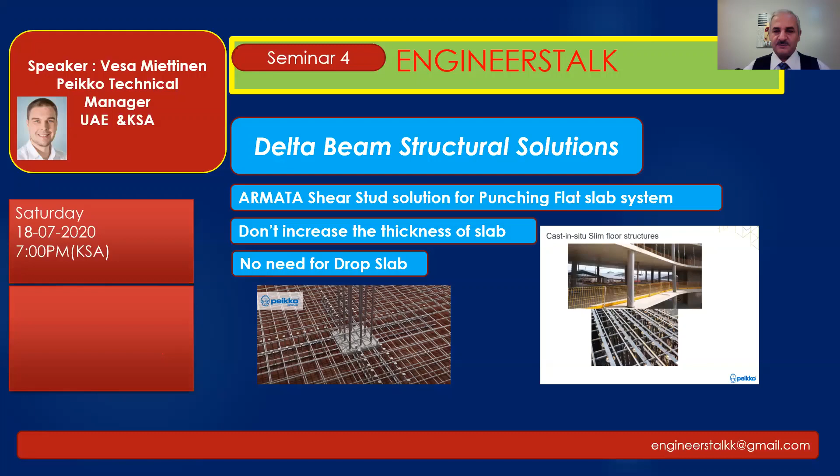So, like you said, today's agenda is Delta Beam composite beams, which we'll go through first with some basics, and then I will show you the design tools we are offering. After that we'll move on to Armata stud rails.

A couple of slides to begin about the company. It's a more than 50-year-old company, and it's a global company, started in Europe and now spread all over the world. Our closest units in the Middle East are a factory in Ras Al Khaimah, UAE, and a sales office in Dammam, Saudi Arabia.

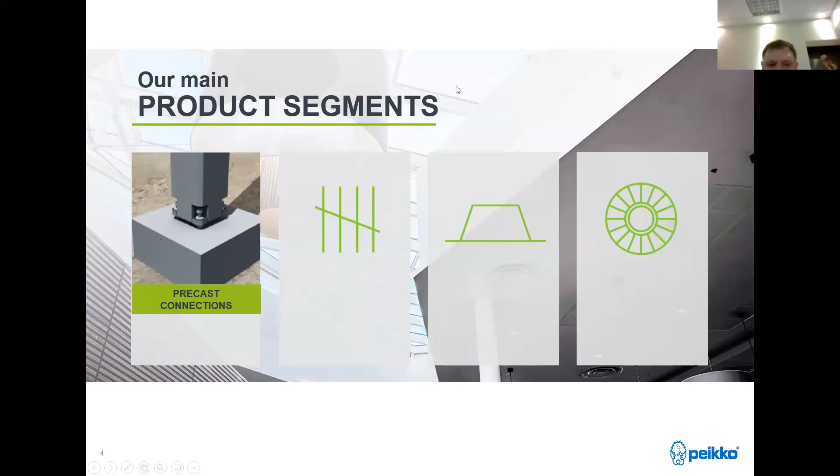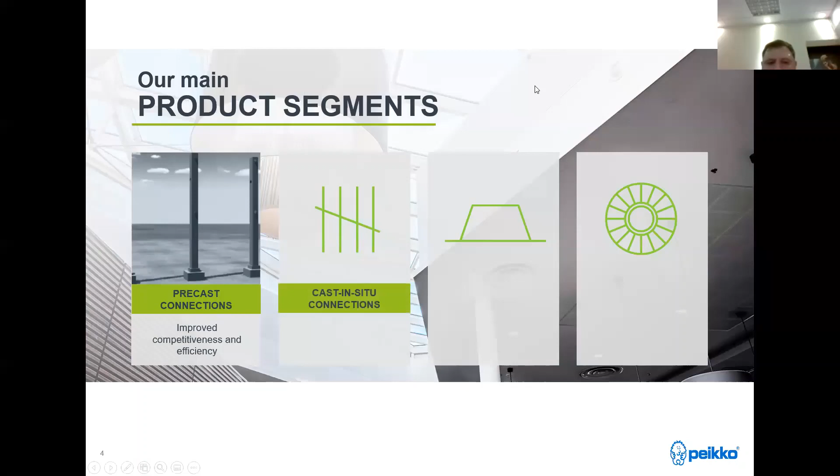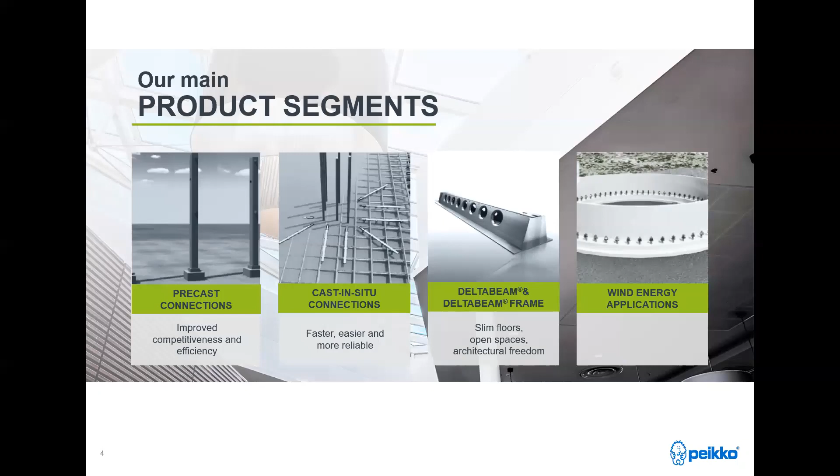We have four different product segments. First is precast connections, which we won't go through today, but if you're interested you can contact us about that. Then we have cast-in-situ connections, of which stud rails are a part. Then we have Delta Beam and Delta Beam Frame, which are the composite structures and composite frames, and wind energy applications, which we also won't touch on today. But as with precast, if you need more information you can always contact us.

So let's start with the Delta Beam composite beam. I will show you a video first. I hope you can hear the sound, let me know if it's not clear, but let's try.

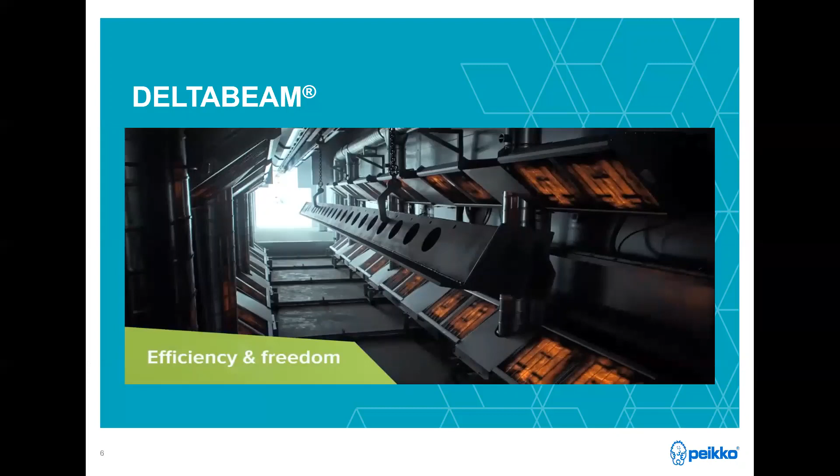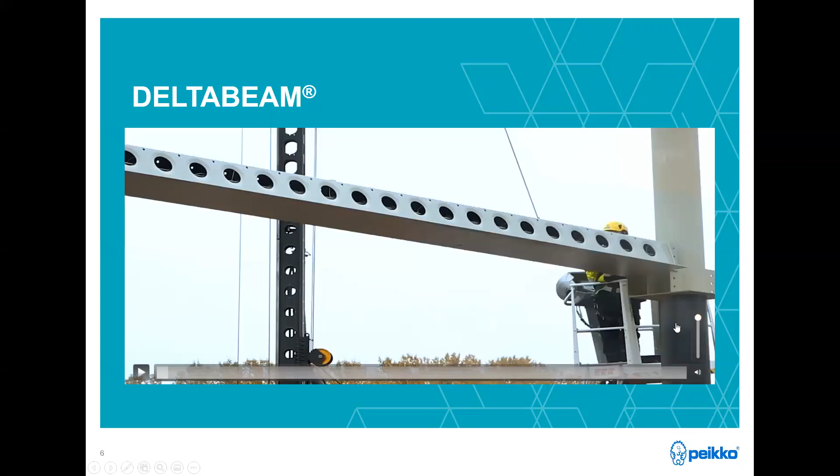Mr. Fiza, can you check the sound? There is no sound, no voice. Yeah, that's what I was afraid of. Sometimes the sound in the video doesn't come through. I don't know what the reason is.

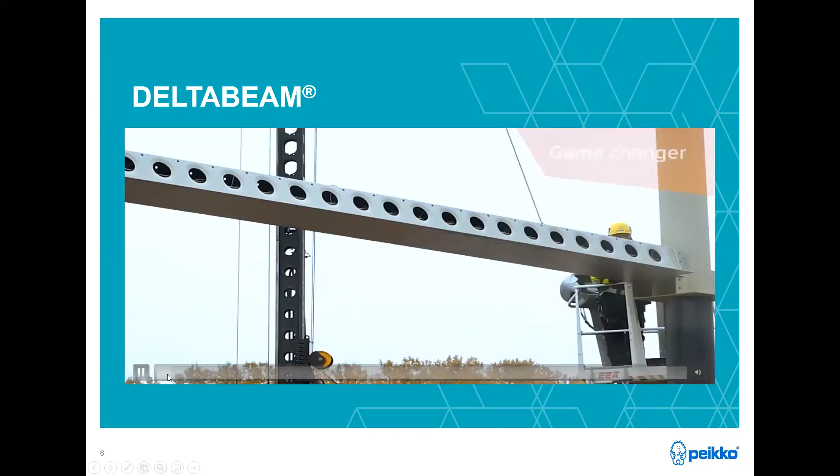Let's run it through without sound, I will explain meanwhile, no problem. So, as you can see here, it's a slim floor beam, which I will explain in more detail after the video.

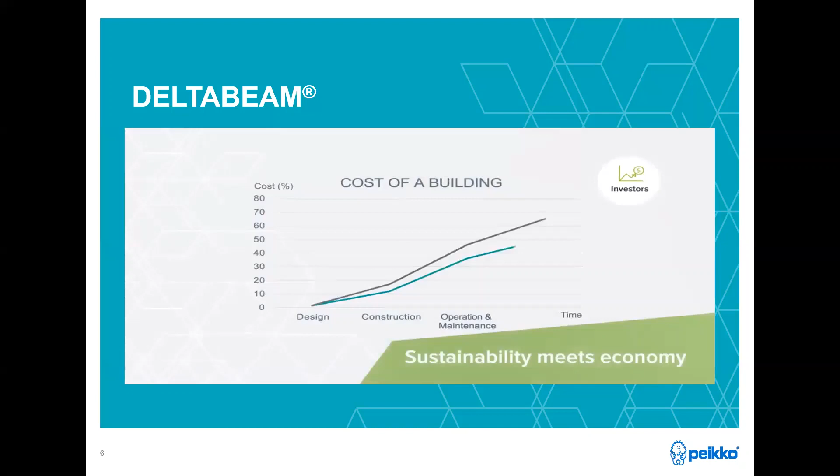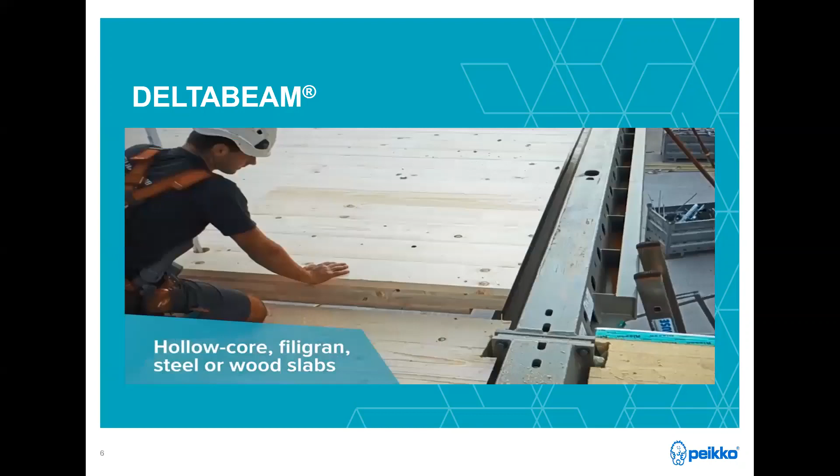So it gives you the option to lower your building height or lower the total volume of the building with the slim floor option, which is cost effective. And as it's a steel beam, the connections are very flexible to all kinds of columns. All types of architecturally demanding shapes are easy to do, and MEP installation is simpler because there's no drop.

We will go through this DELTABEAM Select tool, which you're seeing now on the screen, after the slides. I will show you what we are offering for designers, and I will briefly cover the in-house design work we do.

So far we have completed more than 15,000 projects already.

Sorry for the missing sound, but let's continue. This is the basic section you can see here. It's a steel section which is always designed project by project, and all these plates are designed specifically for the specific beams, and also the rebars inside the beams.

There is one feature, these web holes which you can see on the side, and this has an important role in connecting the beam to the slabs, creating shear connection between the beam and slabs.

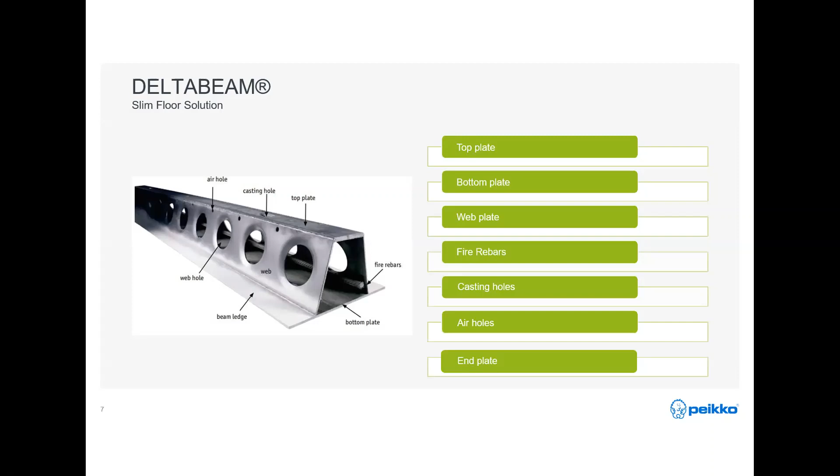As was mentioned and shown in the video, it allows you to have a low floor height. Optimizing your floor height means you can also optimize the volume of the building, perhaps even build another floor on top of a high-rise building or multiple stories. You can maybe achieve the same building height with more floors.

And of course, it's sustainable because you can reduce your cooling costs in this area. There is no heating here, but cooling. And of course it also reduces your maintenance cost when your building volume is smaller.

Mr. Fiza, sorry to interrupt, but there is some comment from our friends. The voice is not clear, if you can raise your voice or use a mic or headphone it will be better. I will try to speak a bit louder. Can you hear me now, better? Okay.

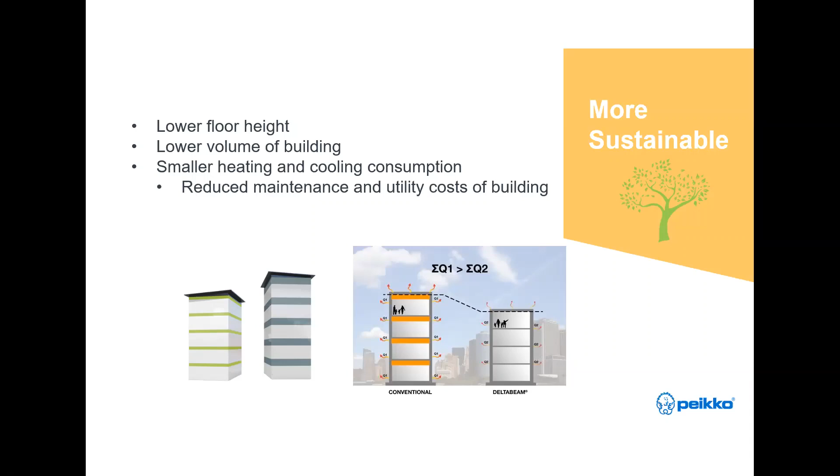And like I mentioned, we are manufacturing this in Ras Al Khaimah for the Middle East market. So it's local manufacturing with very affordable prices and fast delivery times. We don't need to import it from Europe or elsewhere.

You saw in the video this MEP. Because it's a flat slab system, there is no drop. In most cases, we will design it without a drop, unless there are very long spans that require a drop, then the flat floor option is not possible.

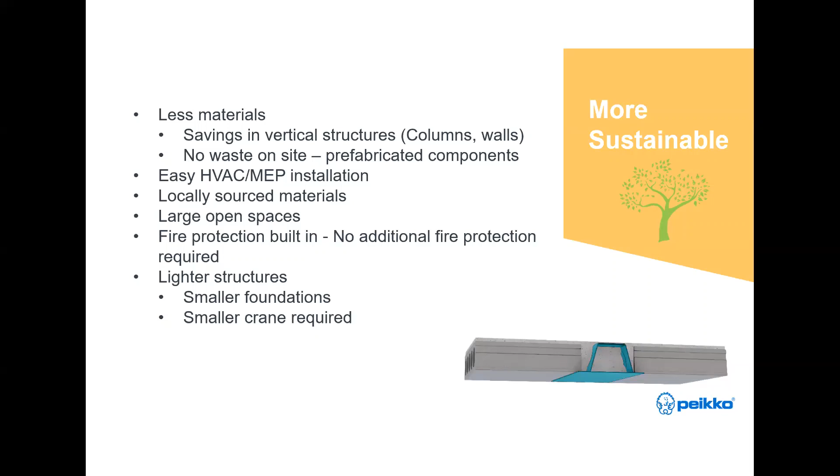Fire protection in the beam is built in, so basically even the bottom plate is exposed. You don't need any fireproofing under the beam, in the bottom flange. And it's a light structure as well. Compared to the equivalent stiffness of a concrete beam, it's much lighter, so it can allow you to optimize the foundations as well as the cranes on the site.

Here you can see as a comparison those typical steel and concrete beams, which normally have a drop, and thus some of these benefits cannot be achieved with those systems.

It's a steel beam - we manufacture the steel part at our factory, then bring it to the site, and it will be filled with concrete, so it becomes a composite section in the end. It's a very flexible beam in terms of connections, so we can create many different types of connections based on project requirements - can be pin connections, can be fixed connections.

Slab types can vary from hollow core slabs, which is the most commonly used slab type with this beam, to this kind of filigran type slab, half-cast slab, or steel decking as well. All kinds of slab types are possible.

In the bottom section, you can see also beam connections - primary and secondary beam connections are possible, as well as cantilevers in the beam.

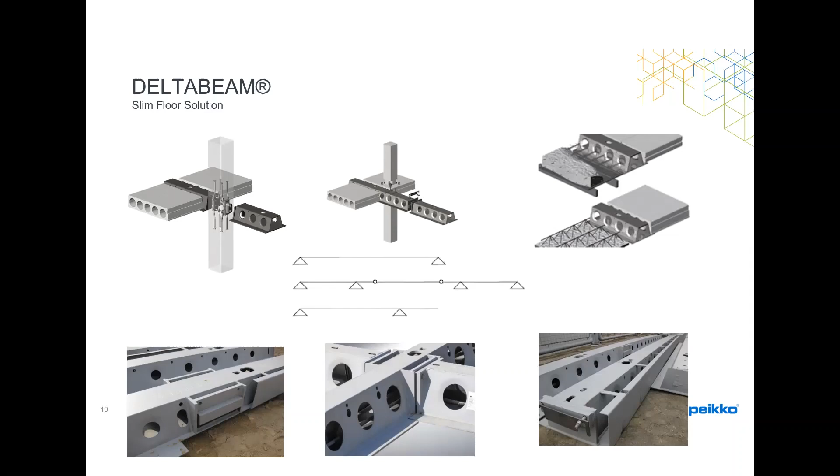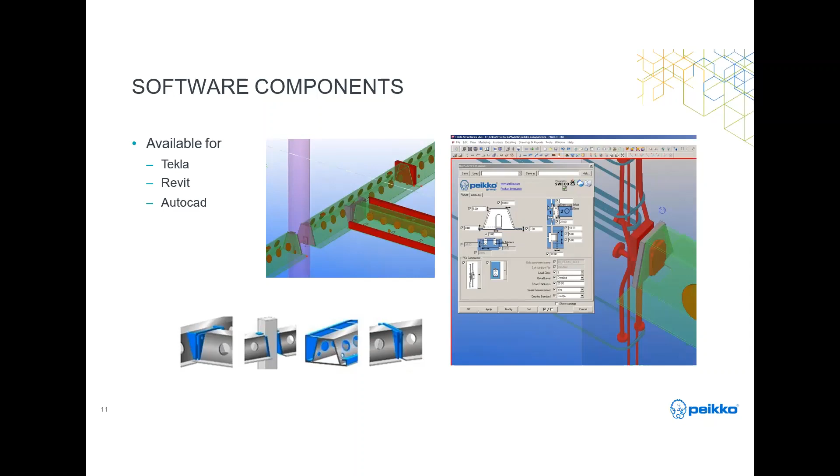Then a few words about the design. As we are mostly engineers here, I will go briefly through the design principles we follow with this beam. We need a three-stage design because there are 3 stages for the beam. First, the erection stage, which is only a steel member because there is no concrete filling inside the beam yet, so we can only utilize the steel section. This is during the erection of the slabs, when you erect the slabs on top of the beam.

Next phase, once you have erected the slabs, you will fill the beam and fill out the joints of the slabs if it's a hollow core slab, and then it becomes a composite beam. We can utilize the composite section, including the concrete, and also utilize the top concrete structural topping. In this area we always have structural topping for the diaphragm for seismic reasons, but in Europe there are cases where you don't have structural topping, just a leveling screed.

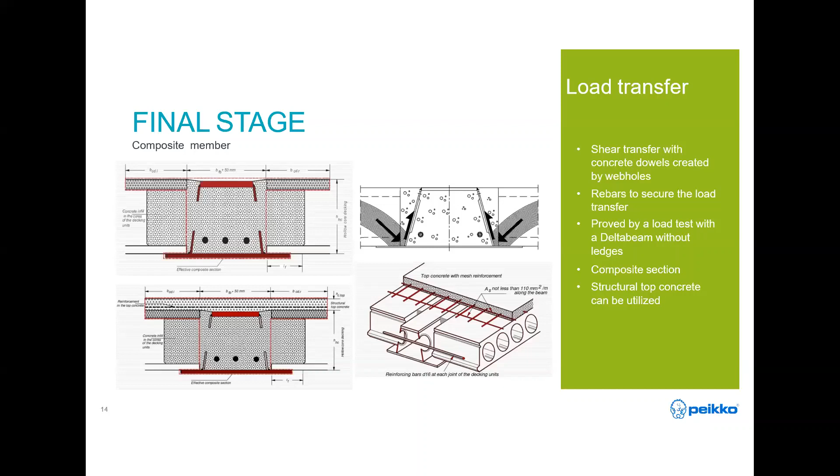Then the fire stage - like I mentioned, there is no need for any fireproofing on the bottom flange. But we place rebars inside the beam to handle the fire situation and the bending during fire, because you lose the strength of the bottom plate during fire. That's why we have these rebars inside the beam, inside the concrete, which stays cooler.

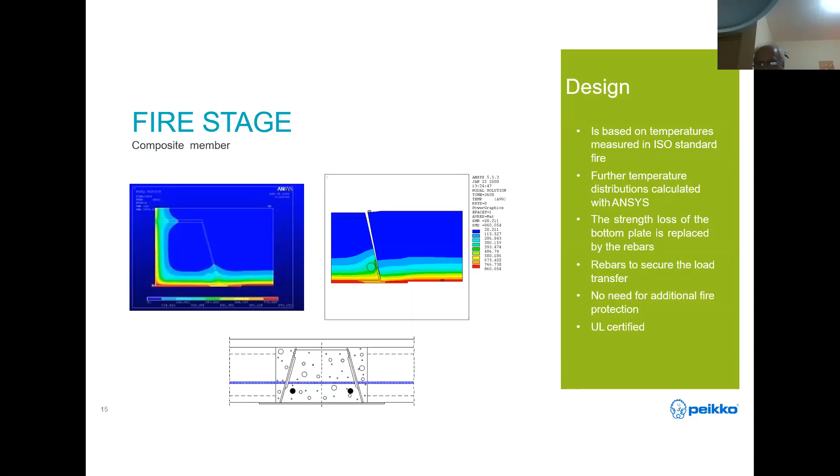For calculations, I will show you next what kind of DELTABEAM Select tool we are offering for customers, but the final design we always do in-house at Peikko. After the DELTABEAM Select tool, I will briefly show you our internal software which we use for design - just for the same beam, to compare what we calculate with this tool versus Deltabeam Select, going through the same beam design in our software.

You can find this software on our web page. It doesn't require any installation - it's a web-based tool. No need to even register if you don't want to print out reports, if you just want to see the section sizes.

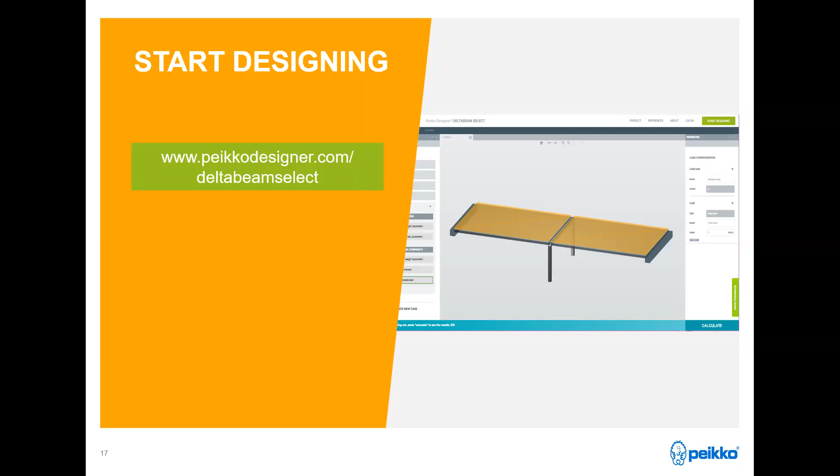So I will go through this on our web page. This is the front page, what you will see when you enter our website peikko.ae. Here you click for designers, and here you can find Deltabeam Select. When you click it, it opens here, and you can click start using.

And then it brings you to this website, so you can immediately start using the beam design here by clicking start design.

Choose your location, whether you are in UAE or Saudi Arabia, you can choose it freely from here. Then what type of the building it is - I will choose now domestic residential building. And then it will bring you to this model here.

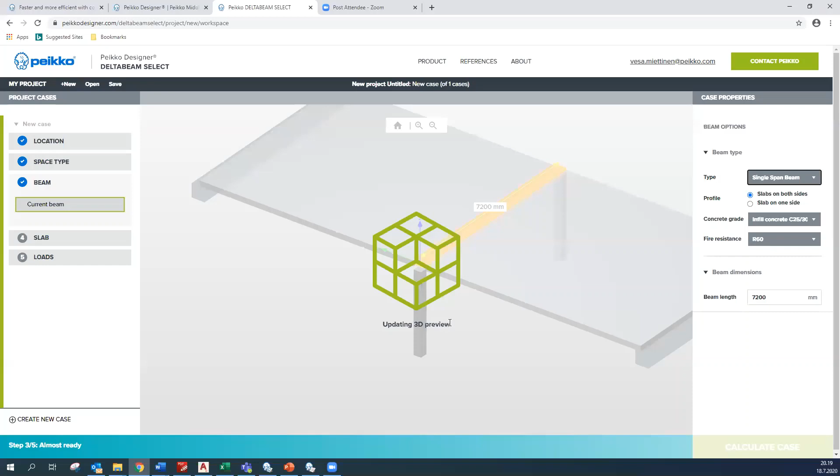So first of all, we need to put our beam here. So we can put, let's say, 7.2 meter long beam. Infill concrete, fire resistances are here. Slabs on both sides or one-sided, you can choose this as you wish.

Then next one from the left side, you choose the slabs. What is it, hollow core slab? 270 here. Top concrete, let's put 60 milli top concrete here. Maybe 8 meter long.

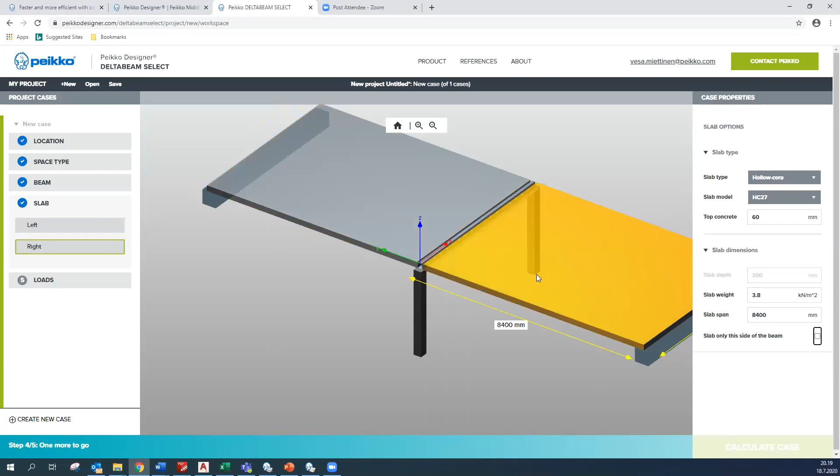And this tool is limiting the beam length to 12 meters because this is typically the limitation for the transportation. So if you have longer than 12 meter beams, then contact us and we will guide you on the special cases, because we can do more than 12 meters, but this is only the limitation on the software here.

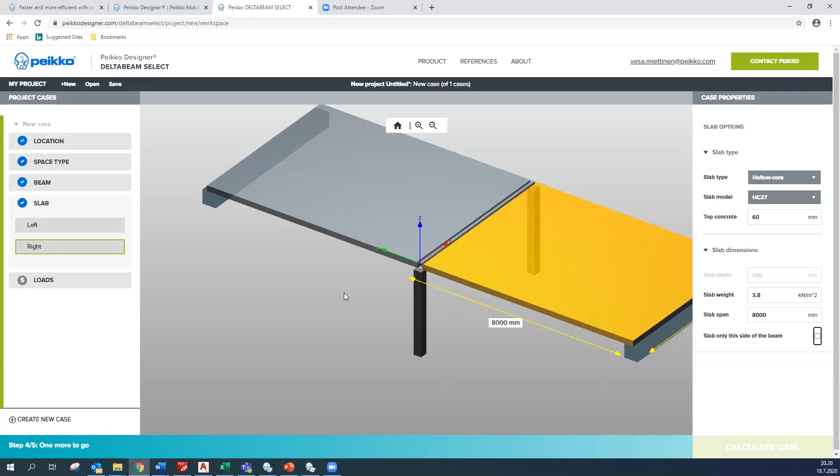Then you have specified the slabs. Last thing to do is the loads. So you can see here self-weight is automatically taken care of. Temporary loading during the installation, all the people who are erecting, for example, on top of the slabs, it's taken care automatically, as well as the self-weight of the beam. What you need to do is put permanent loads, SDL here, let's say 3 kilonewtons per square meter, and variable load, let's put 3 as well.

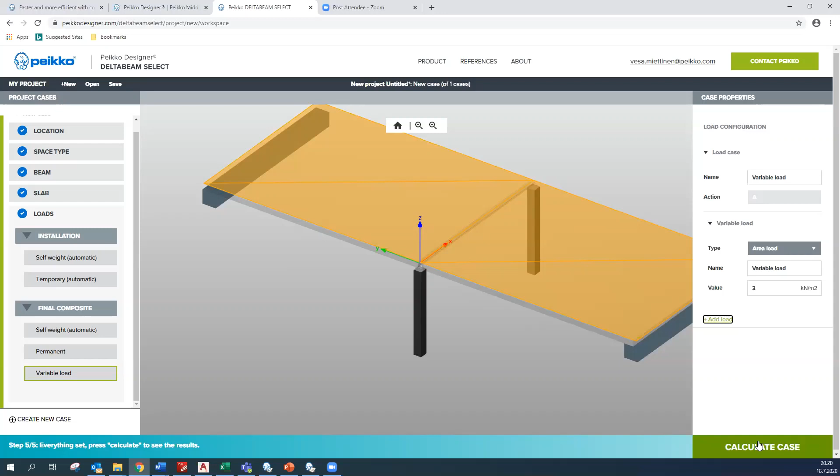Now, if everything is set, you can then click calculate the case here on the bottom right. Then it will analyze the beam, what types of - it will give you 3 different options if it's possible to use three different types, and we will see then what kind of options we have for the beam design.

Let's see when the results will be available. It takes, depending on your network connection, it takes a little while. Looks like now it takes longer than normal.

Okay, now we have got the results. So here, clicking go to results, it will show you these 3 options. So first option is slim floor option, which D26 means the beam height above the bottom flange. So it's the same height as the hollow core, 260. And 400 means the width of the web plates in the bottom of the section.

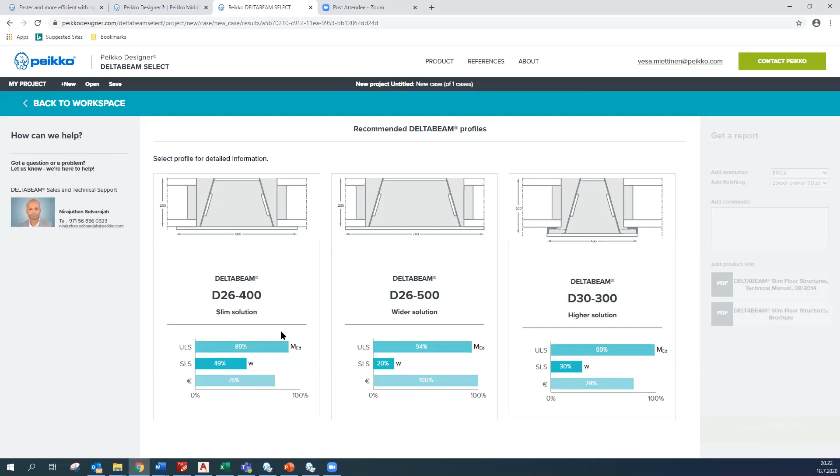Then we have another option with wider beam, D26-500, and then we have a small drop here, which is D30-300. So these are the options, and here you can see the approximate utilization for the section in ultimate limit states and service limit states. And this euro here marks just the ratio in their prices. So this wider beam is the most expensive, and related to that, these other beams are approximately 75 to 80% out of that price. So let's take this slim option, the narrower slim option.

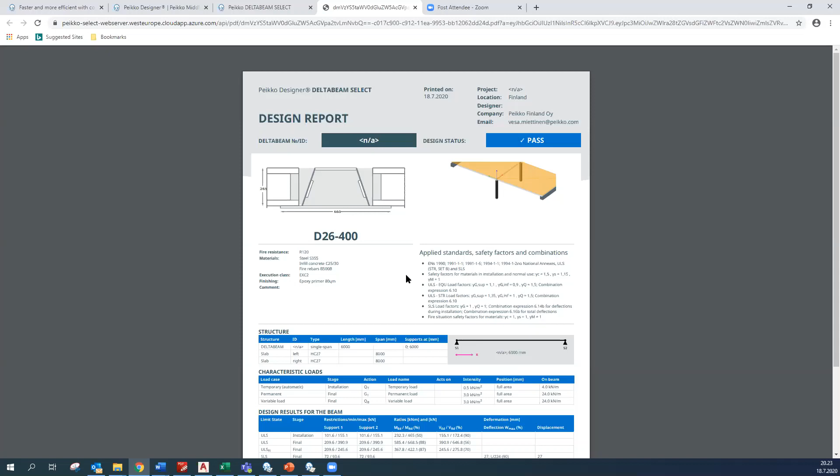And if you have signed in yourself, you can create a report. So basically, this tool doesn't allow you to design those plate thicknesses. This is the detailed design which we are doing always in house in Peikko. So you will see the section width and section height, what is possible for your case. And then if you print this design report, you will see the moments, what are the moments according to the loads and spans what you have implemented there. So this kind of report will come available from the software.

Then I will show you briefly our in-house tool. It looks like this. I made the same setup here. So our beam length is 6 meters, and from the middle of the beam to the end of the slab is 8 meters on both sides.

And when we calculate the beam here, we can see the same what I mentioned on the slides. We have stage 1, then we have the composite states, and then we have fire states, and of course we have also the deflection service limit state here as well.

So here we have the same section, D26-400, and I have used 20 milli plates and web plate 6 milli, and five rebars.

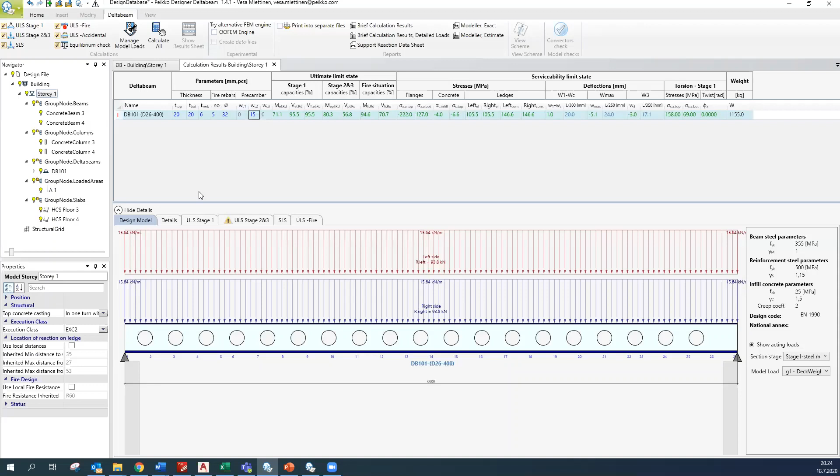5D32 inside the beam. This value here is a pre-camber value, so we are doing pre-cambering for the beam for the erection state. So when you go to SLS, after you load this beam member with those hollow core slabs and at the topping, then we are designing this pre-camber so that the beam should be flat after this, and the final deflection comes to the composite member.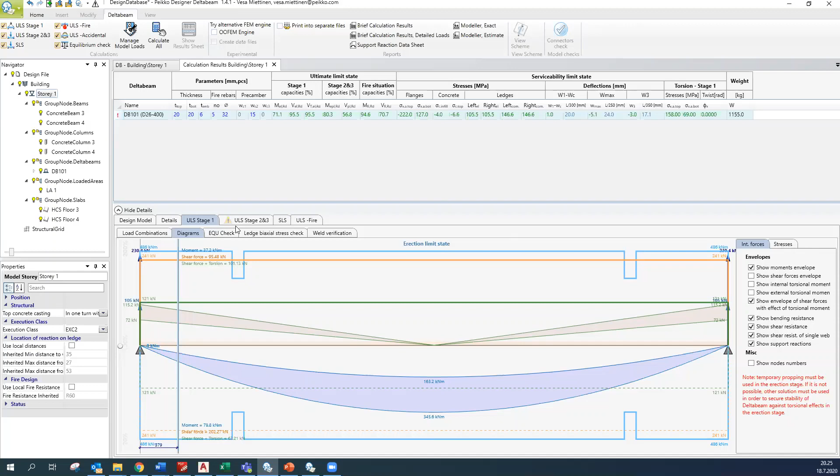So here we can see this. I will not go so much into the details, but moment for the erection states and moment capacity is here for different. If you want to see the values somewhere in the mid span, you can always track it around here. Same for the composite member. So here we have moment 551 approximately, and then capacity is 686.

When you are building, if you want to do a project with Delta beams, we of course give you the details of the section stiffnesses, if you want to input it in your ETABS model. Here you can see the steel section stiffness and then the composite section stiffnesses for sagging and hogging, depending on if you have simply supported beams or continuous beams.

This is the deflection after pre-camber when you have erected the slabs on top of the beam and cast it. And this is the final deflection in the beam, the long-term final deflection, 5.1 millimeters.

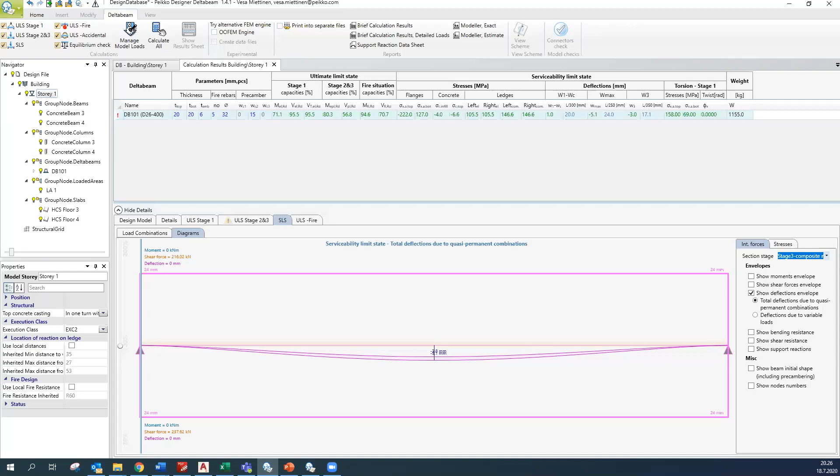Okay, let's continue. This was briefly about the softwares. Let's continue for this, Armata stud rails. Let's go through a few references for the Delta beams.

This was a hospital project in Riyadh. You can see here we created continuous beam lines, so it goes continuously over the column, and we can add holes in our beams, which allows the starter bars from the column below to go through the beam to the next column.

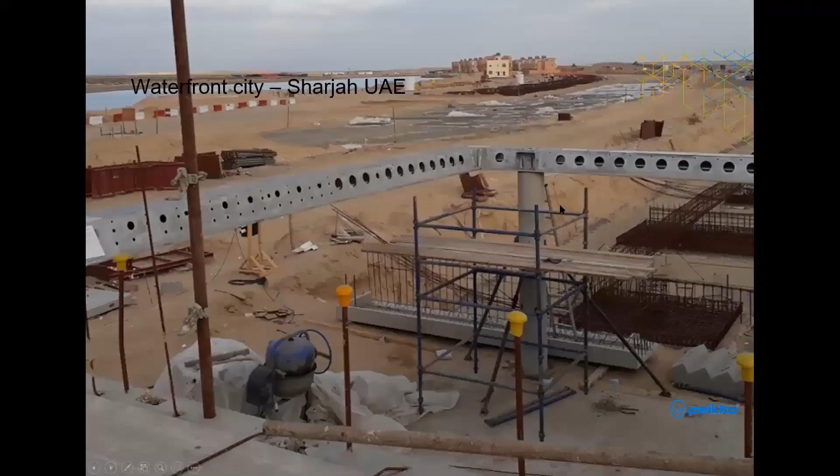And we have Sharjah Waterfront City, where you can see also this secondary and primary beam connection here. At the end of the cantilever, we connected the secondary beams to the primary beams.

When it comes to long spans, we have one project in Ras Al Khaimah where we had an 18.5 meter span in the mosque project. Here in this part, you will have this dome of the mosque in the middle.

Architectural expression - here you can see these curved sections created with Delta beams. So actually the beam section is straight, but we can do the formwork so that the facade surface will come curved already in the factory.

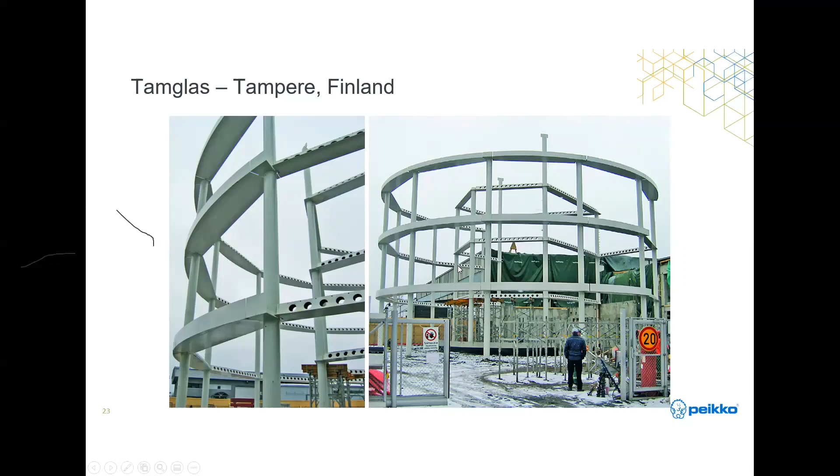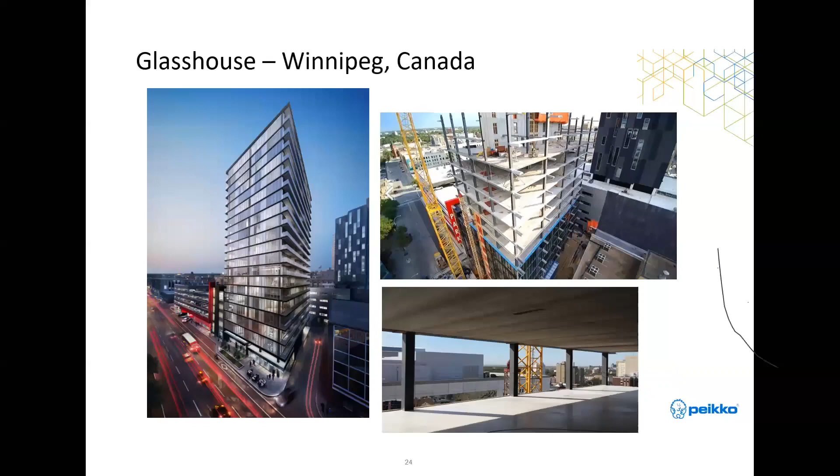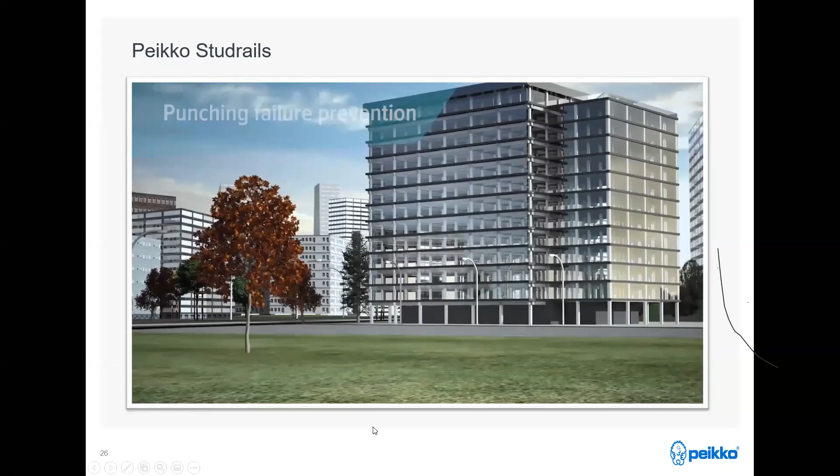All right, next topic was the Armata stud rails. Again, I have a video - I'm afraid the sound will not come, but let me try to explain. So this is also a slim floor system, but for cast-in-situ structures.

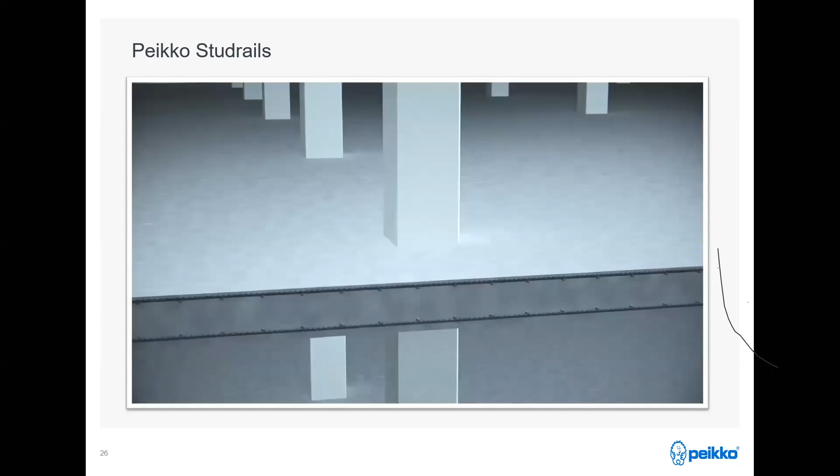Of course, there are multiple options for how to deal with the punching shear failure. It can be column capitals, drop panels, or a thicker slab. The stud rails are the best option. And it's not only for the floor slabs, you can use it as well in the foundations.

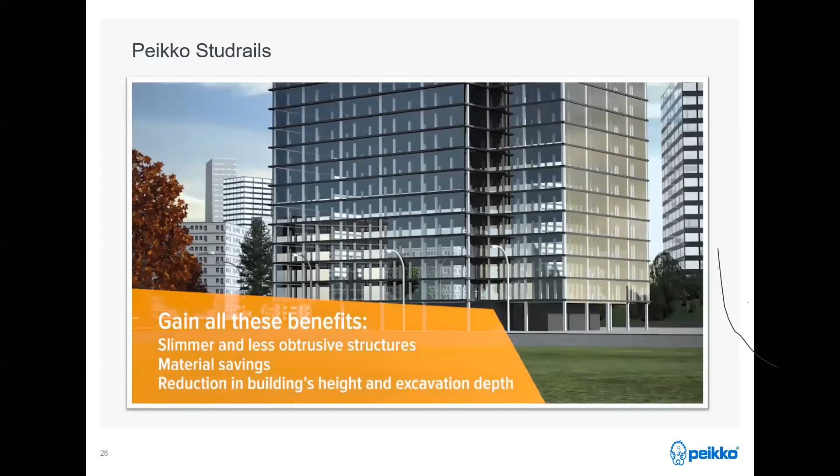Similar benefits like with Delta beam - of course you can reduce the building volume, or you can reduce the floor-to-floor height and build another floor.

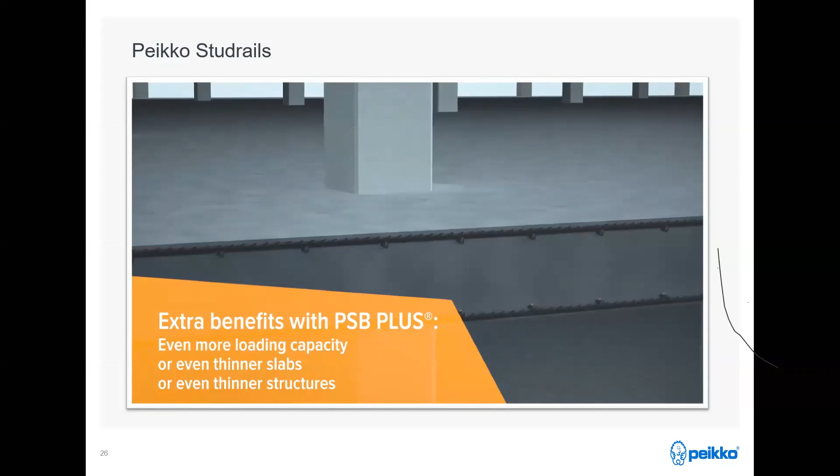There can be installations on both - creating these stud rails from the bottom first and building around it, or you can drop it from the top after you have done the reinforcing of the structure.

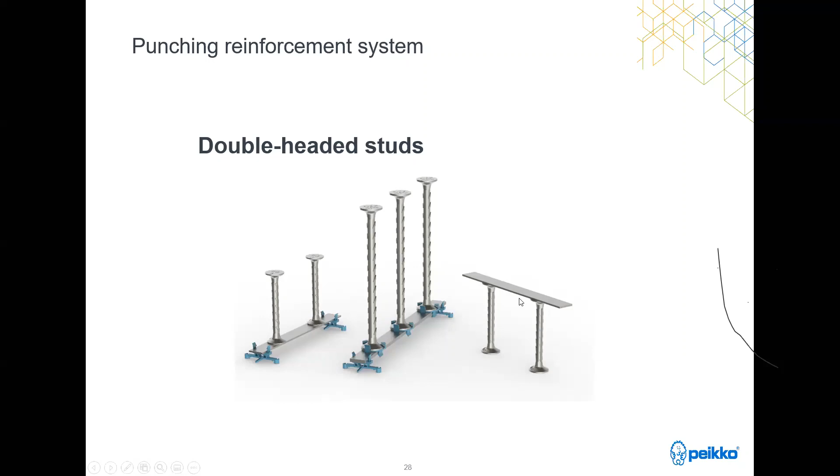Here you can see the different options for where you can use the shear studs. This is our shear stud type - we have double-headed studs, only tack welded to the rails to keep the spacing and to provide the full rails already to the site. So we are not full welding - there is no structural welding between the flat bar and the headed studs, because the anchoring will happen in the heads.

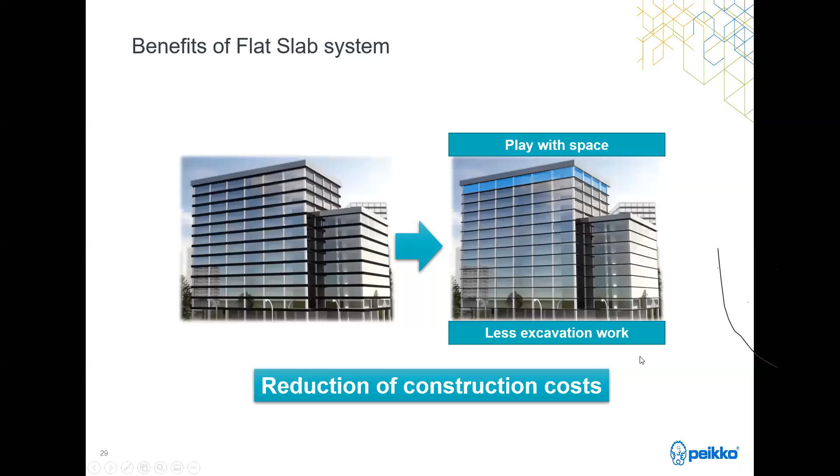This was already explained in the video, similar benefit like with Delta beam. We can reduce the floor height, avoid these drop panels, and don't complicate any of the installations. Just to have a ceiling floor that's easy also for the partition layout - you can modify it later on if required.

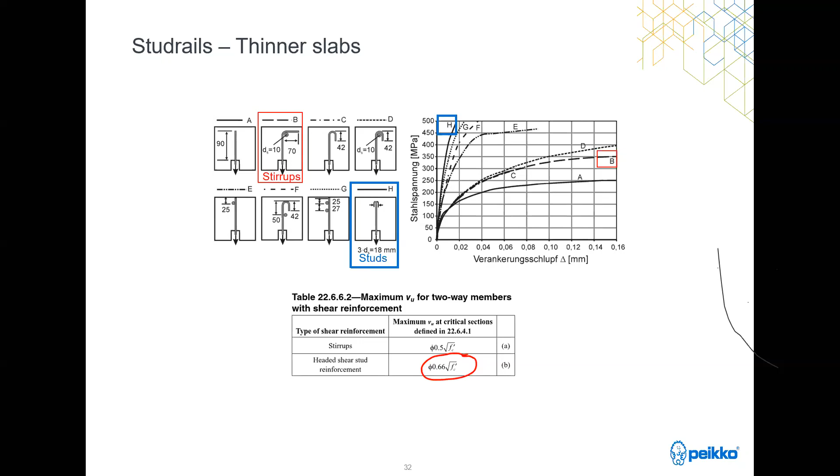These are the failure modes. I won't go through all of them, but I'm sure most of you are aware of the failure modes that can happen with punching in slabs. Of course, failure mode A you need to take into account. We cannot influence this with studs or any shear reinforcement, but you need to account for it in the slab bending design, with enough negative moment reinforcement.

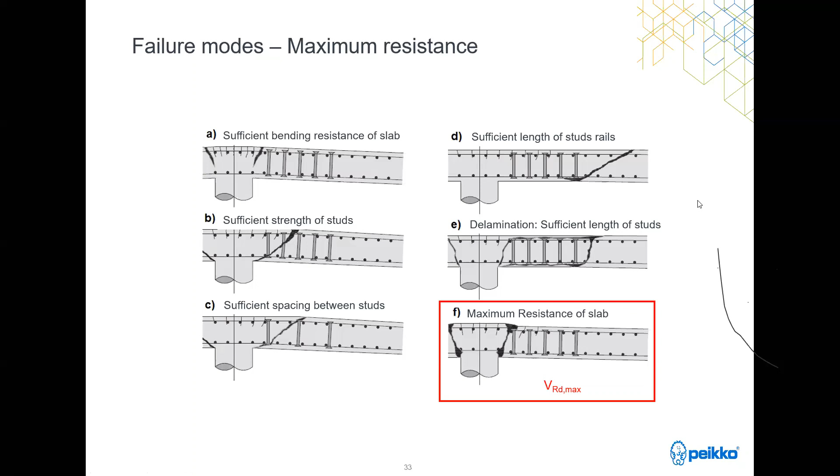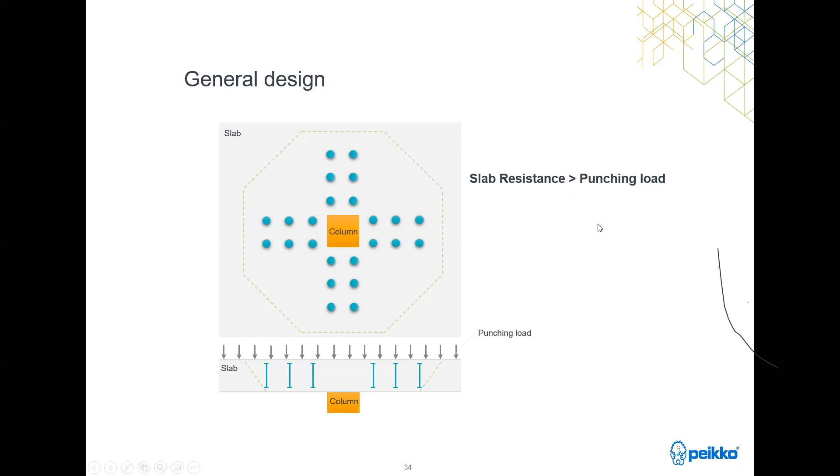Basic design: you check the basic perimeter first. If the capacity is not sufficient, you increase your perimeter by adding studs. You check again, and if it's still not enough, you add more studs, as long as your shear area and shear stress in the slab is able to carry the loads without shear reinforcement, and then your design is sufficient.

If you use our software, which I will show you after this and explain in detail how to use it, you will get a stud rail code, Armata in this case, and you can then specify it in your calculations and in your designs.

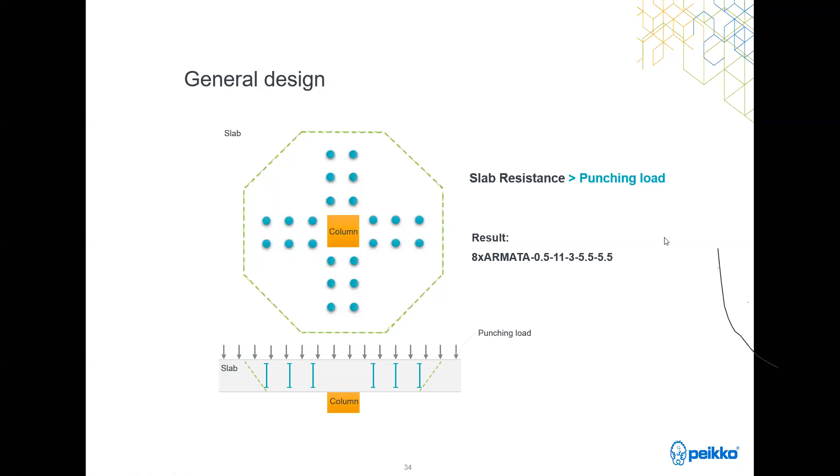Just an example of how much you are saving: if you have no punching shear reinforcement, your slab thickness requires to be, in this example, 520. If you use stirrups, you can reduce it to 450. If you use stud rails, you can reduce it even further to 300.

Sustainability is a big topic depending on the project. Some projects already require LEED certification or other types of certification, because this will save you a lot of concrete. One cubic meter of concrete is approximately 300 kilos of CO2, so this will be good for LEED certification by saving materials.

Here you can see a screenshot from our software. It also allows openings close to the column area, which is difficult to achieve with drop panels. And it includes ACI code and seismic design as well.

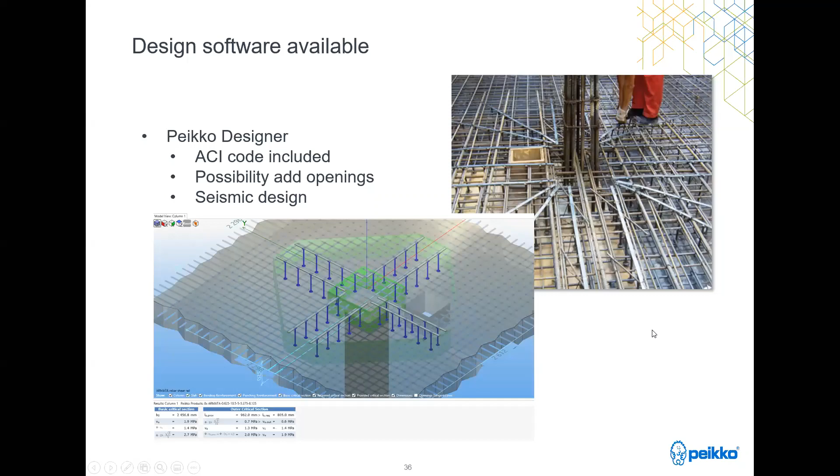Installation, like I mentioned earlier, is very easy. You can do it bottom up, building the reinforcement around the stud rails, or the other way around, which is the most commonly used method, where you build your reinforcement and then drop the studs on top of the main top bars.

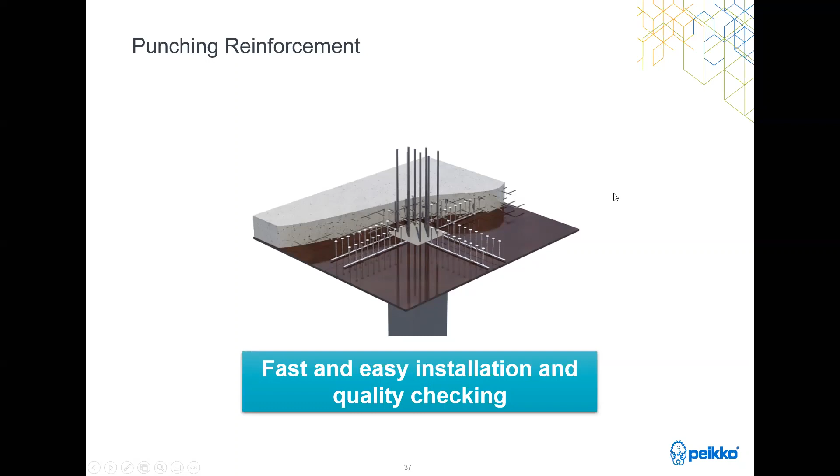There is no need for extensive quality checking of these studs, because compared to shear links, where you need to bend it always around the main bar and make sure it is in contact with the main bar, here we don't have this problem. So there's more freedom in placing it, and more security design-wise.

All kinds of concrete slabs can be used with this system: post-tension slabs, normal reinforced concrete slabs, all kinds of cast-in-situ slabs, and foundations as well.

It's an approved system, and as it is specified in ACI, for example, it doesn't require any specific approvals in most countries. We have local support here in UAE and Saudi, so we are close to you. We can help you with your projects and the design tools available.

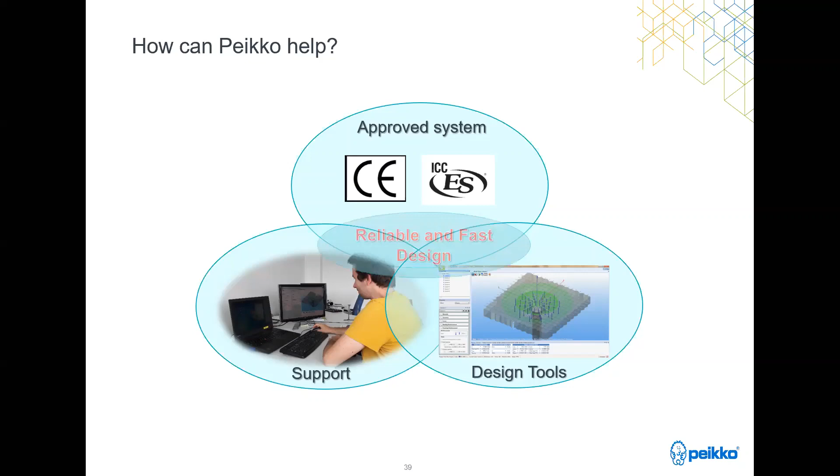That was it about the presentation. Let me still show you about the software.

If you go in the same place where we found Delta Beam Select, you can also find Peikko Designer here. It's free software that comes with these modules. If you click here and input your email, you will receive the password for usage, and you can start using it. It's free.

When you open the software, it looks like this the first time. We have column connection modules, then punching shear reinforcement, embedded anchor plates with headed anchors, and these are web-based tools: Delta Beam Select and API Select, which is a balcony connector. So here we will try the punching shear reinforcement design.

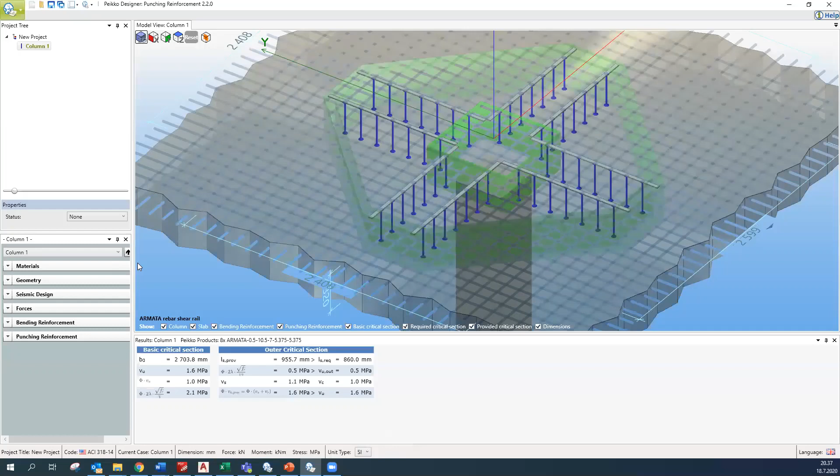If you choose ACI like we have chosen here now, it defaults to the imperial unit. So I will choose SI, which is more commonly used in this area, so we want to have the metric units in use. Then we start specifying the slab, the concrete in the slab.

Let's say we have 35 megapascals concrete. Here's the column type, whether it's square, rectangular, or circular. I can choose rectangular, and this is the position, whether it's in the middle of the slab, the edge of the slab, or in the corner. You can click these values here. Let me choose the middle.

Then your slab thickness here, as well as the column dimensions. Let's say we have 300 by 1000.

Top and bottom cover here, whatever is your cover for the main bars. Slab openings - this is interesting, though.

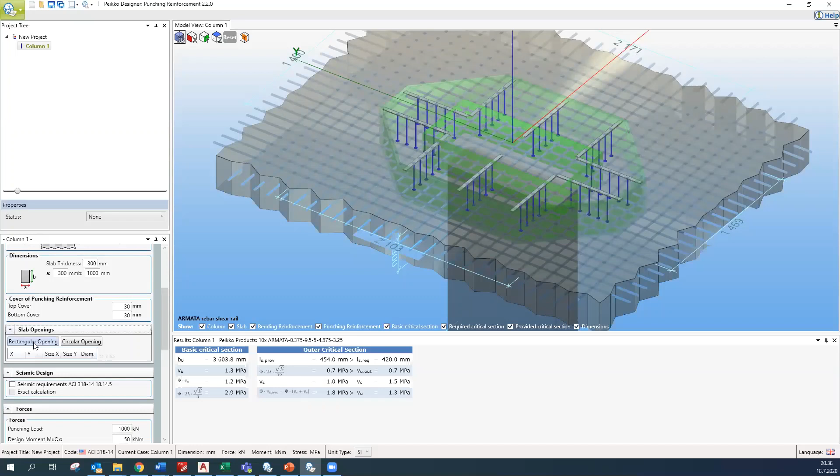You can add either rectangular openings or circular openings, and you can add multiple openings, not just one. Here you can specify the coordinates, or you can just drag and drop the hole wherever you want, and it takes it into account in the design.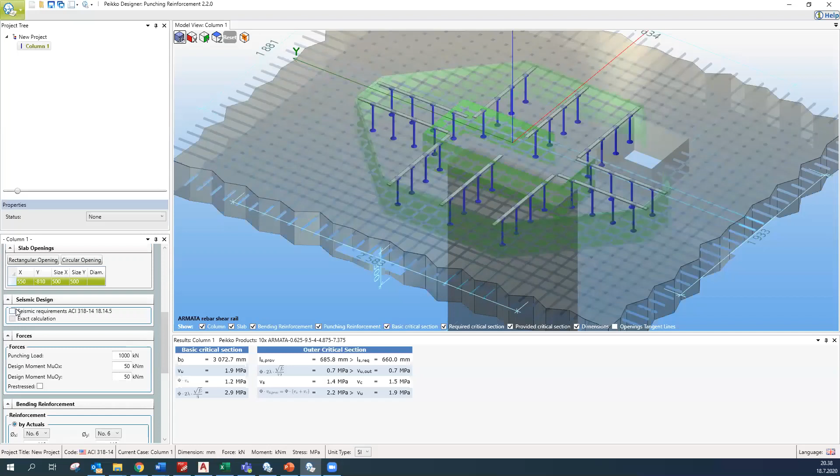We have seismic design for higher seismic criteria. If you have seismic which you need to take into account, you can click it here, and if you need to do the exact calculation, you can. Seismic design - if you have all the exact data, you can even optimize the seismic design. If you uncheck this exact calculation, it is always conservative because it's for the maximum loads.

Then your axial load here - let's say we have 1000 kilonewtons and moments in both directions. You can use as per the design. Notice that this is the unbalanced moment between the floors, what you need to input here.

If you have post-tension slab as per ACI, you can utilize also the post-tensioning value, but this is, as per ACI, only utilized when your concrete grade is lower - I think approximately 30 or higher, then it has no impact for the design. But in case your concrete strength is weaker and you have post-tension slab, you can utilize this one here.

And then the main bars, what you have - this will not have impact for the negative. It will not check the negative moment of the slab, but it has impact for the effective height of the structure. So put here your bars, whatever bars you are using, and it will take that into account for the effective height calculation. When it's green, you will see that the design is passed with these criteria.

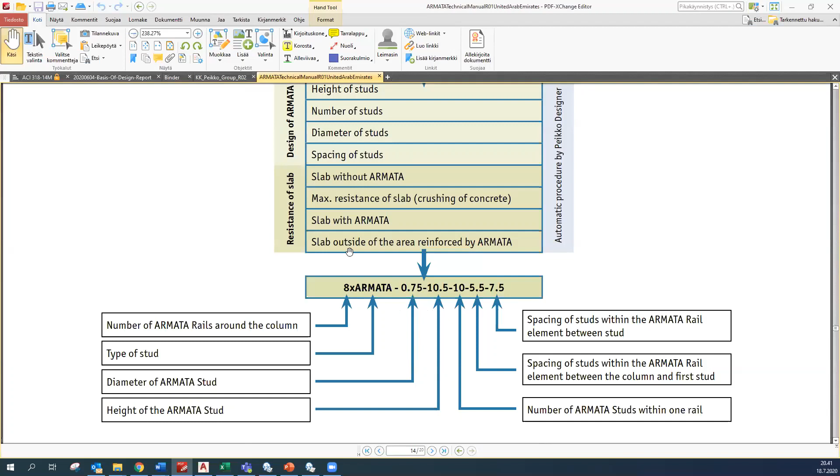So here you can have the explanations. The first number is the number of the Armata stud rails. Then we have diameter in inches, then the height of the stud in inches, then the number of studs in one rail, and the spacing of the studs.

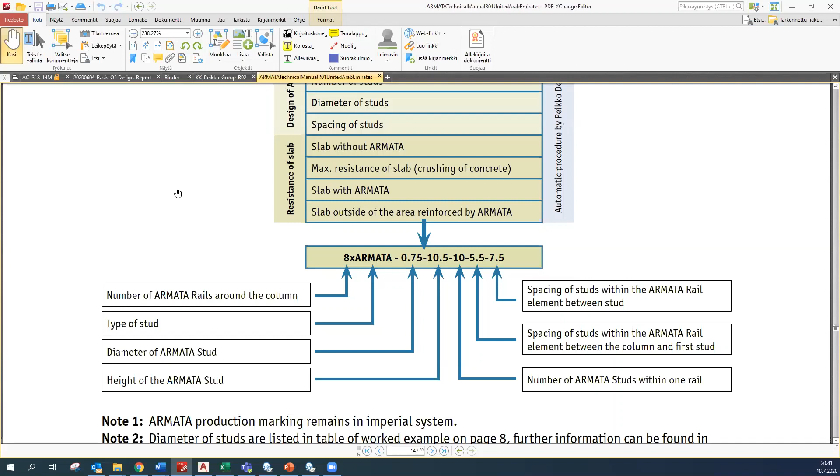So there you go. And then when you choose the case, it jumps to the other screen, but here you can also export the AutoCAD for the same model. So if you want to export the AutoCAD design, you can do it from here, DWG, and it will create the CAD drawing automatically.

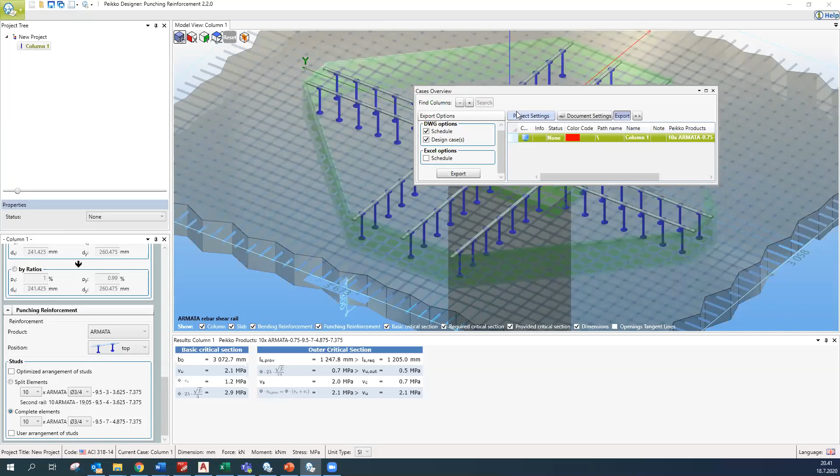That was more or less what I had to show you today. If now we could maybe start with the questions, if any.

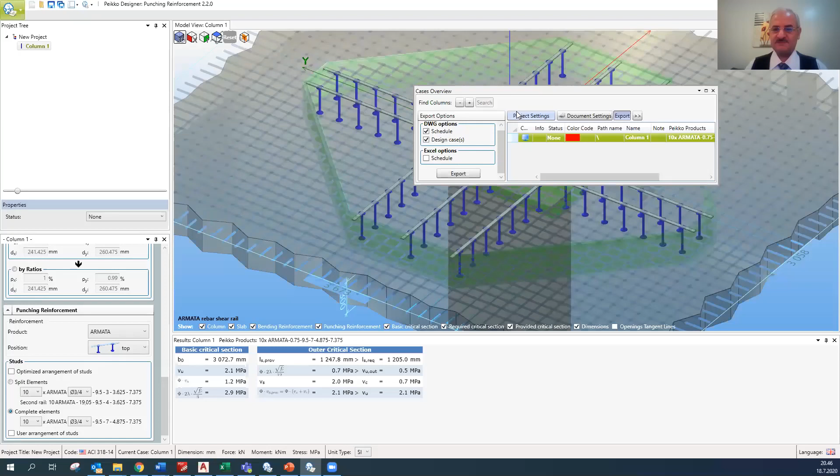Very nice. There's one question: what is the useful function of the circular openings for delta beam? I think it's on the economic side - these web holes, what I mentioned, the circular holes in the delta beam. We call them web holes because they're in the web plates. So what is the function of those?

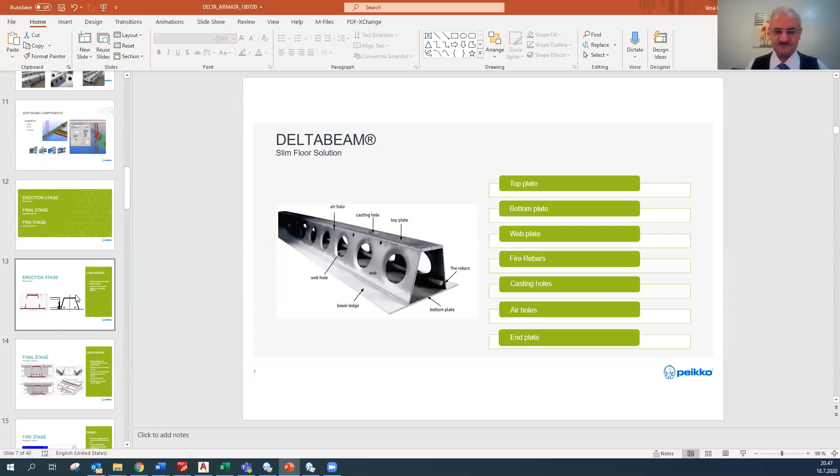Let me take the presentation so we can see that. The function of those is actually here, you can see this - yes. This will create a shear capacity between the slabs and the beam, so it has a big impact. Of course we don't want to put all the stress from the slabs onto the bottom flange, but the bottom flange will carry the slabs during the erection stage. Later on, when you do the infill concrete, it will create this shear connection - shear keys, you can say - between the slab and the beam.

Okay very nice, and this is the idea for that. Another question: when do I have to use this composite delta beam, filled with concrete? We call it composite delta beam - so when do I have to use it? If you want to use it with precast slabs. No, my question - maybe you didn't get me. My question is, this is a delta beam, it's a hollow steel section. Yes, but you said during the lectures we can use it also as composite and fill it with concrete. When we fill it with concrete, the methodology of design will be different, right?

Correct, so when do I have to use it in this case? Of course it should always be filled with concrete, because of the fire requirement - always it should be filled. Yes, always fill it with concrete, because otherwise the design principles we have for the beam are not as they should be, so you always need to fill it with concrete. But what I mentioned earlier, this steel member is only hollow because of the erection stage when it's still empty - later on it always has to be filled with concrete.

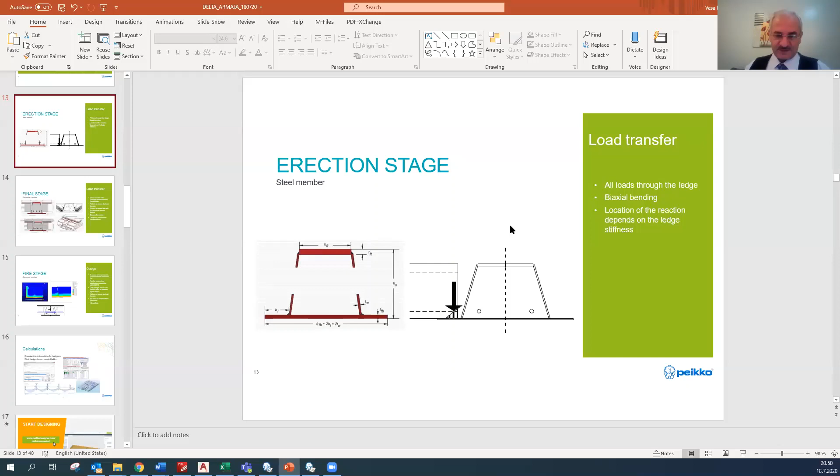Let me try to understand the question. They want to know the bearing length for the beam or slabs, and whether the end of the delta beam will rotate given the length of this beam, 20 meters or more. It depends on the project and the details, but it can be propped.

For example, this beam is fixed with bolts to the wall in this case, but it depends on the project. It can also be propped during erection for torsion, and after everything is cast in, there will be no torsion in the beam because we add reinforcement bars in the joints of the slabs.

These bars will take the torsion in the final stage, to prevent the rotation from the torsion applied during erection.

Understood. The question also regards the robustness requirement to avoid disproportionate collapse. What are the horizontal tie arrangements between the precast hollow core units at the delta beam? For example, internal floor ties within the hollow core unit. These bars are between the hollow core units.

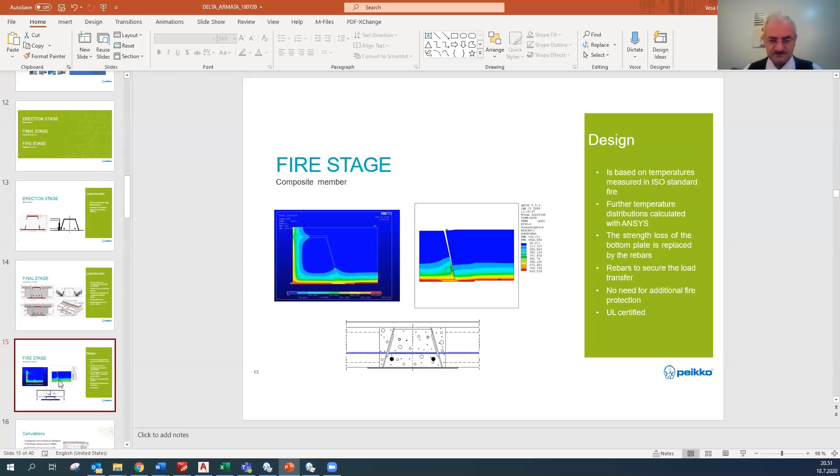The other question: since we use a slimmer floor system, we gain a reduction in overall building weight, giving savings in foundation size and seismic load mitigation. But at the same time, the building system may become more flexible for lateral deformation, which is critical for lateral serviceability and the glazed facade. The question is what is the limit where the slimmer system could change the overall building behavior?

We will check it. If the consultant has a glass facade or other critical facade, we need to limit our beam deflection like with any other beam, L over 500 or L over 250, depending on the design requirement. Like I mentioned, for deflection control during erection we pre-camber the beam, which reduces deflection in the erection stage. These stiffness values are always put into the ETABS model and analyzed accordingly, and the same principles apply as with any other beam.

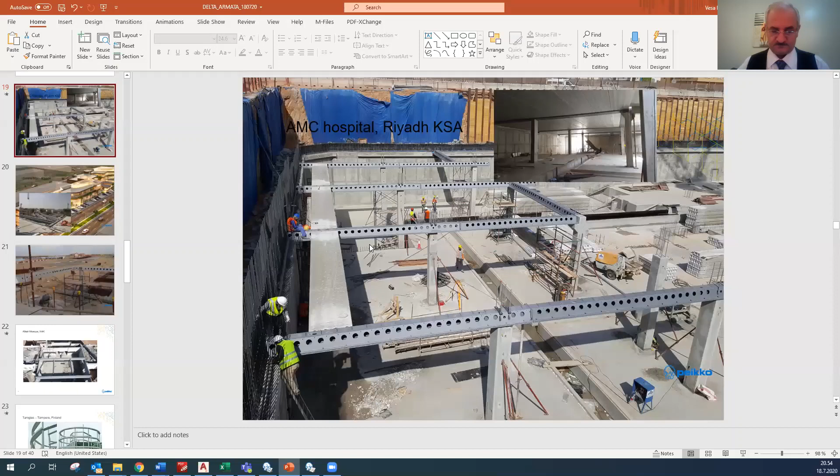The next question: how to model the delta beam in traditional software such as ETABS, and what assumptions need modifying to consider the actual behavior of the delta beams and connections? In most cases it's modeled as a steel beam because it's closer to that, with only infill concrete inside. You need to use a generic section and input values for it in ETABS, and the same applies if you have a start prop, for example.

Next question: how to achieve continuity action as a continuous beam in the delta beams, and what are the continuous connection details? This question came from friends who couldn't attend the seminar, but I think from this picture the continuity of the beam is clear.

Exactly right. We have this beam going over the column, fixed with the column. We create holes in our beam which allow bars to go through it. Then it is cast in one pour inside the beam, and you continue with the upper column on top of it. This is the most common method for continuity.

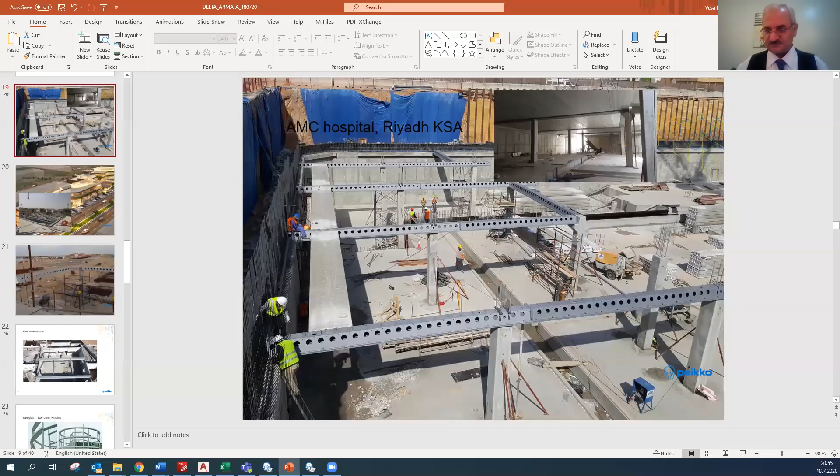There are two questions more about the delta beam and continuous beam regarding shape and size. For the delta beam in a continuous beam, the shape and size of the section will be the same at the negative moment region, but locally it can differ - let me show you in our software.

Can you still see the screen? Good. For a continuous beam, we can add locally some top bars or top plates at the section where there is continuity. In this case I added two additional bars to the section. If required for the negative moment, we make these kinds of local changes in the beam section - all done at our factory already and included when it's brought to the site.

And here, of course, accordingly, these values for sagging and hogging stiffnesses will increase if you add some bars on the top.

I think we have the last 2 questions. If I have a hollow core slab and I have a problem in execution of the beam, can we consider that the delta beam is the best solution? We have a problem with hollow core slab and with the time of execution. So they are asking if reducing the time is a factor, and what is the system cost?

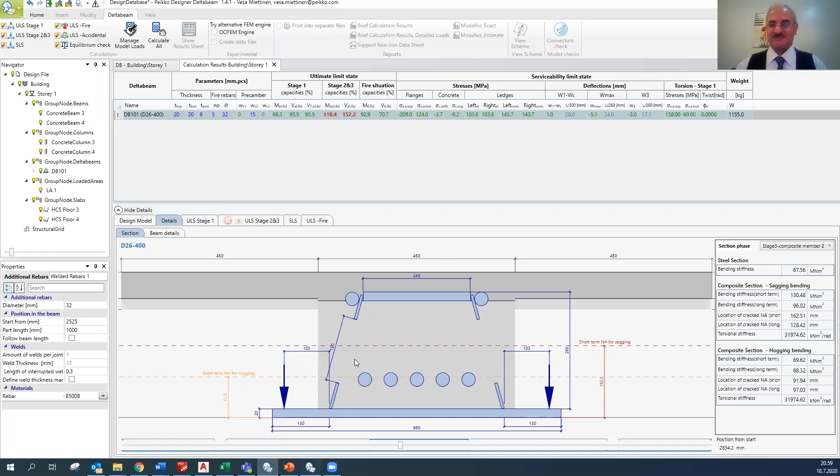Many questions came, all asking about an idea of the cost of the delta beam. Really, it is an important factor in construction, as you know. The contractor always considers the cost.

Definitely, yes, everyone is taking care of the costs, and I would reply similarly, because it's not like an I-beam where you always have the same plate thickness or the same section. We can modify the section and modify the beam according to the project. So we would need the project details, the slab layout, to be able to design the beams. Or if you already have an ETABS model, we can utilize that, and then after designing the beams, we can give you the pricing for the project.